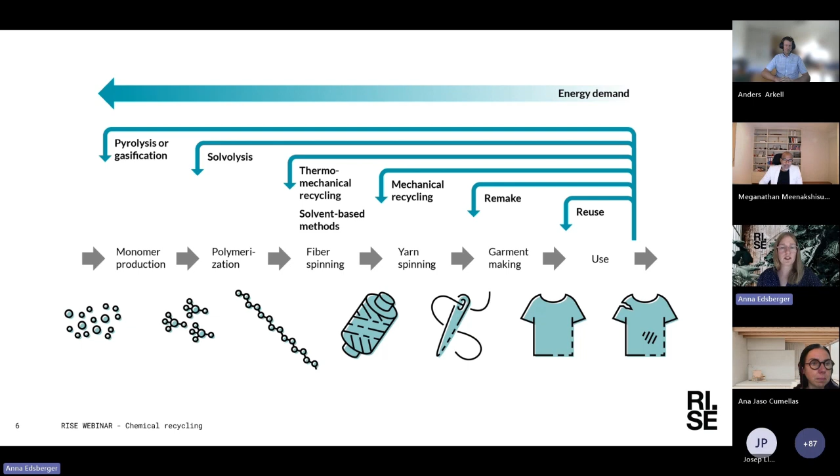At RISE, about 3 years ago, our research in chemical recycling was almost exclusively done based on the funding from research grants. And we used some 10, 12 years building up knowledge in the area. And today, about half our revenue on this matter is actually from the private sector. So we are very happy that we've been able to do this transition together with partners and with companies that are now utilizing the knowledge that we have built.

And as a research institute, this is really how you hope that it should work, that you start out with gathering a lot of knowledge, and then at the end, that can be utilized in real world processes. Just setting the scene a little bit and also putting this into perspective. So today we're going to talk about chemical recycling.

When it comes to the life cycle footprint of a garment, of course, there are many different processes that have an effect on that. So you have a product, it becomes waste, it's collected and sorted. You probably have some kind of pre-treatment like decoloring. You make a fiber production, you manufacture a new product. And if we look at this from a life cycle perspective, this is a study from Mistra Future Fashion, so it's starting to become a little bit old. I think it's from 2017.

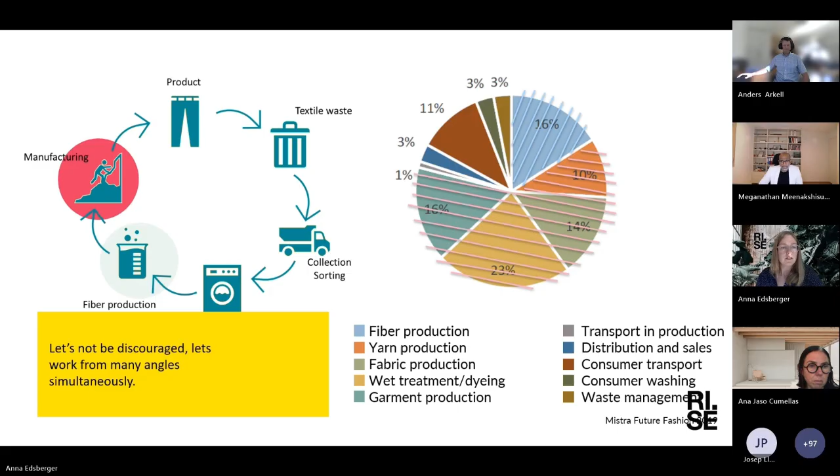So, just a little overview today, some recycling actors. When it comes to polyester recycling, we have four main technologies. So starting with PET, polyethylene terephthalate, we can use enzymatic breakdown of the polyester. It will form the monomer TPA, looking like this. If you're a chemist, this makes you happy. If you're not a chemist, it makes you scared to see these molecular structures.

You can use methanolysis, which means that you're breaking down the PET molecular chain by the use of methanol. Your end product there will be something called DMT. It's a different variation of the building block of polyester. You can also use glycolysis. That means you're breaking the polymer down in ethylene glycol or another type of glycol. Your end product then would be BHET, monomer looking like this.

And then one of your last options is the hydrolysis, which means breakdown in water, typically aided by either an acid or an alkaline environment. You will have then a TPA looking like this. And then there are some other processes like aminolysis and ammonolysis, but these are mainly used at an academic level. But the methanolysis, the glycolysis, the hydrolysis, and the enzymatic methods are currently used either at the startup state or industrialized.

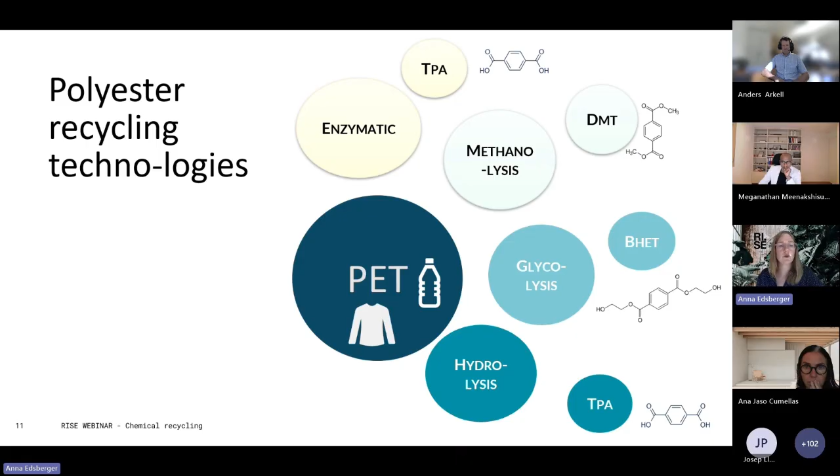So here you can see some of the actors. You can see that currently the glycolysis is the most used method. It's, from an industrial point of view, a rather easy method. You typically don't need to go to high pressures. It's a well-studied process, so it has a lot of benefits, which has made a lot of companies go for this solution. You have a smaller share here of companies going for methanolysis.

This can be a bit more of a challenging process because typically you will need to go to highly pressurized systems. Actually, this actor, Recyclit, has developed a method of low temperature methanolysis. I spoke to them this summer and I asked them what their secret is. Of course, they couldn't tell me, but I would guess it's in the catalyst. Enzymatic actors, not very many. We have Carbios, we have Samsara, using enzymes for the degradation.

And then hydrolysis, we have also some actors. Hydrolysis is also quite versatile. You get high yields. The difficulty is that you typically need to use a lot of auxiliary chemicals. So you would do this, I would say, almost always industrially in an alkaline environment. And in order to get your product, you need to use a lot of acid in order to precipitate a clean product. And there are smart solutions to this, but that's a difficulty that comes with the hydrolysis.

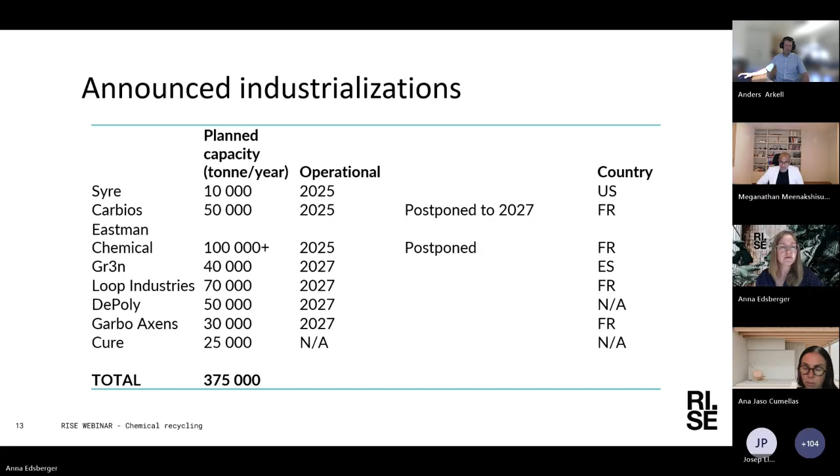So what's the cost then of a chemically recycled filament yarn? So this data comes partially from a seminar held from PETCore. So of course, the chemical recycling has several different cost elements. So you need to have collection and sorting of your textile. You need typically to prepare your feedstock. That could mean removing hard parts, decolorization, etc.

You have a section here from depolymerization and purification. And then the smallest share is getting back new PET polymer and then spinning that. And of course, each of these comes with a cost. For virgin PET, well, this price point changes all the time. Probably some of you have more recent data than I do, but we're at about half the estimated cost of chemically recycled PET. And when I spoke this summer to Tianjin, they said that this was approximately correct. So they were about twice the price of virgin material.

I also spoke to another contact who had been on a business trip to China visiting some of these factories, and she said that on monomer level it was plus 80, plus 90%, but on yarn level plus 60 approximately on the price. And I'm sure that some of you actually have more relevant data there than I do. But what we see here is that chemically recycled comes at a premium, just as the mechanically recycled material that we're used to from bottles. And you also see here that you have a lot of components here that you need to sort out in order to have a process doing the chemical recycling.

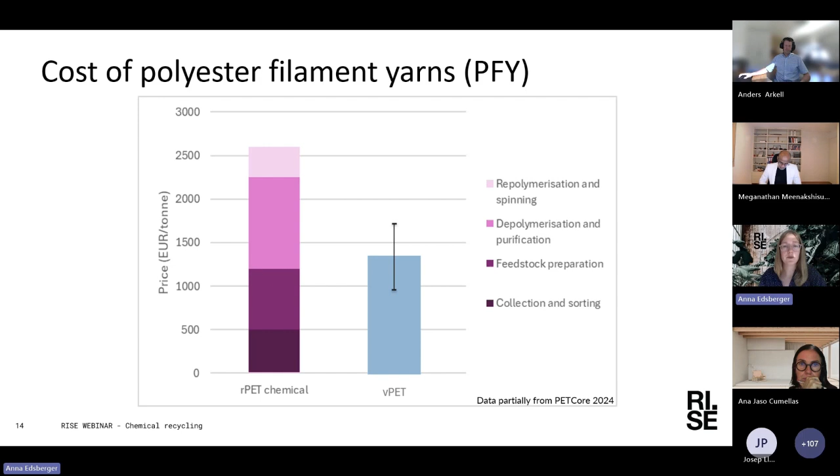Something else that might be of interest are, of course, the reported greenhouse gas emissions. Virgin PET, I took this data from Carbonfact, so about 3 kilograms carbon dioxide equivalent per kilogram of PET. rPET from bottles, about a third of that. Chemical recycling has a quite large spread. Depending on how you design your processes, you can come out with a much lower carbon footprint, but also actually a lot higher. Then, of course, a process that comes out at much higher carbon footprint probably would have difficulties industrializing. But it is perfectly possible, if you aim to recover any byproduct, any additive, etc., that you might build a process that actually doesn't have a positive carbon footprint.

We have developed a glycolysis process at RISE. This is basically a scale up from a lab scale process. There we see that we are at about 75% of the carbon footprint of virgin PET. Cure, another glycolysis actor, is reporting a lot lower values. Syre is a little bit vague. They say that they can have up to 85% reduction. ReJu, also glycolysis, and Carbios is doing enzymatic. They're saying that they will have about 50% reduction.

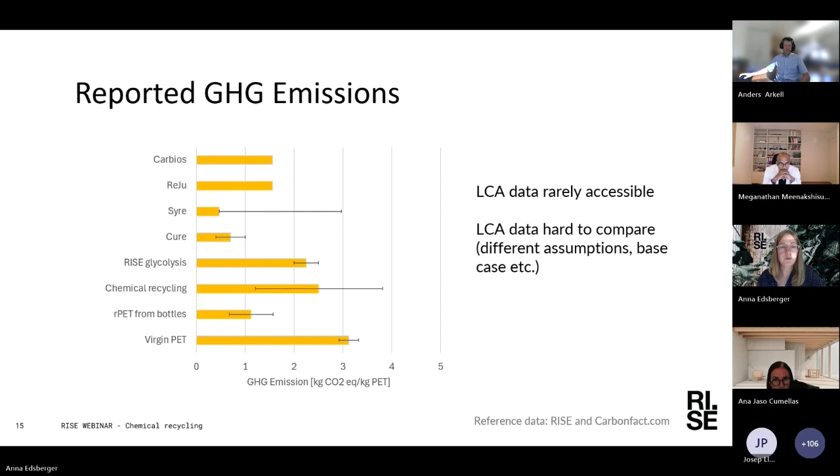So I'm going to talk a little bit about polyester recycling in general and the challenges that we see today, and then go into what we are doing at Rewind and how we are trying to face these challenges that exist. So I would actually like to start to elaborate a little bit more on the LCA data that you, Anna, showed us just before.

And there have been a lot of reports available saying either that chemical recycling or textile recycling is favorable, or that it's just as bad as virgin textile production. And of course, all of those are correct. It depends how you look at it and how you are performing the recycling.

So coming back to what Anna said in the beginning of the presentation, if you can do mechanical recycling, that is the obvious choice. It has the lowest impact and it's cost effective, and good from many perspectives, but when it comes to textiles, it's a rather limited amount of textiles that are actually reasonable or doable to do mechanical recycling due to the complex blends, mixtures, colors, etc. And also because you want to get back the virgin quality, not downcycling.

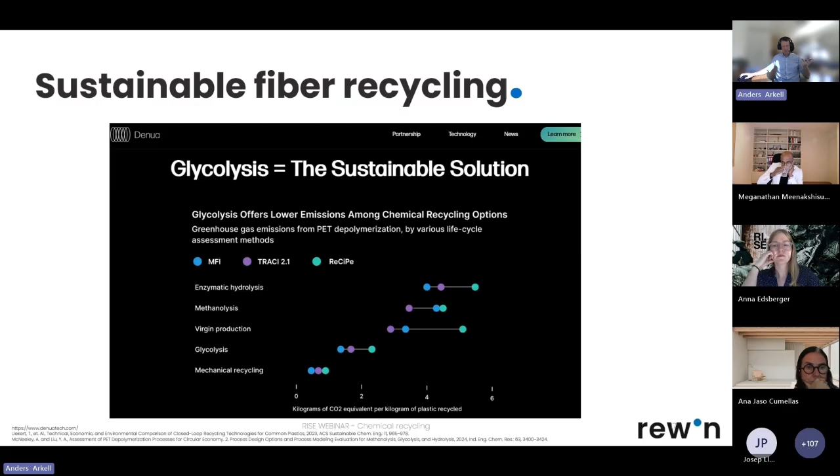However, glycolysis shows much better potential in that respect, and that is one of the reasons why we at Rewin work with glycolysis. So what do we work with? What is our feedstock? Well, for some time we have had the intention and clear aim to work with these post-consumer textiles that are separately collected since January this year.

But what we have seen recently is that our thought that this would be accessible was not really correct. Instead, we have seen what some actors call a chaos in the collecting system. We see that second-hand and charity organizations have difficulties, and we don't see an establishment of a material sorting industry. This means that polyester recycling based on this separately collected post-consumer textiles is probably a little bit ahead of us in the future.

Instead, we have started working with other fractions that we believe are more available in the near future. One is post-industrial waste, like clips and spills from the production. Then we are not talking about Northern Europe because we don't really have a textile industry at scale here. Instead, we are mainly talking about Asia, where that could be relevant. But one other interesting fraction that really exists here is post-sorted municipal solid waste.

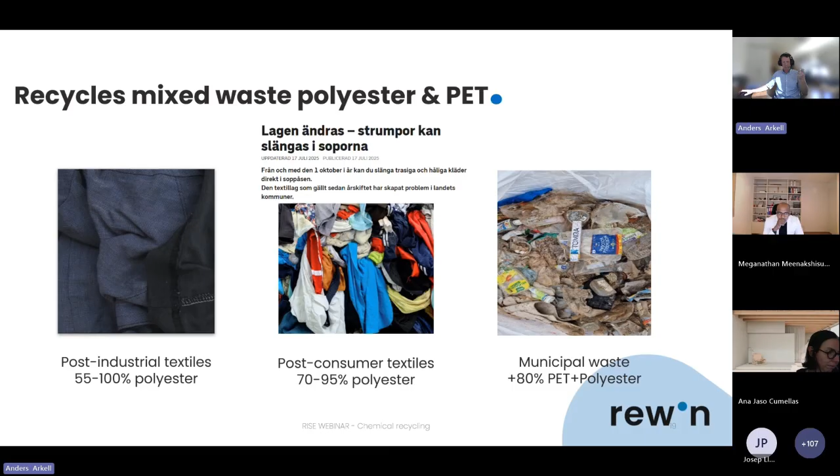So, at Rewin, what are we doing? Well, we are working with these three different fractions, and we have set up a process that is very much simplified on this picture. But what differentiates us from all of our competitors is that we have totally skipped one of the major process steps that usually is in the beginning of the recycling process, and that is the pre-processing. Instead of shredding, hard part removal, trim removal, compaction, agglomeration, pelletization, we take the textiles as they are directly into a chemical reactor where we dissolve the polyester. And by doing so, we increase our yield significantly and lower the cost of the process.

The report that Anna referred to earlier states that all this pre-processing typically costs like 700 euros per ton of textile waste, and we have removed that with our pre-treatment reactor in our process. We also have a special type of catalyst that not only degrades the polyester into monomer, but also enables us to do very efficient decolorization. So our product is the BHET monomer that is completely white and has a quality that can replace the virgin material, the fossil material, in the big polyester producing plants in Asia.

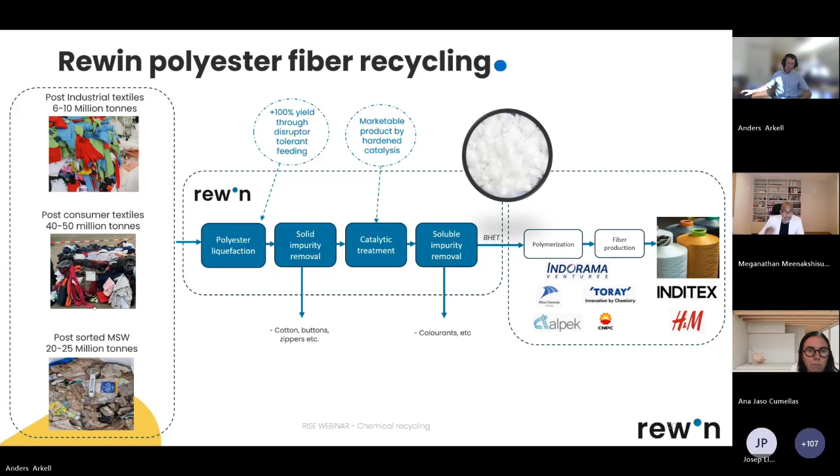So our quality is proven. We have several polyester producers that have confirmed that our quality is as high or sometimes even higher than the virgin raw material that they use today. So that is not an issue. The processing is not an issue since we have cut off all these pre-processing steps. What is more of a challenge is accessing the feedstock for this kind of plant.

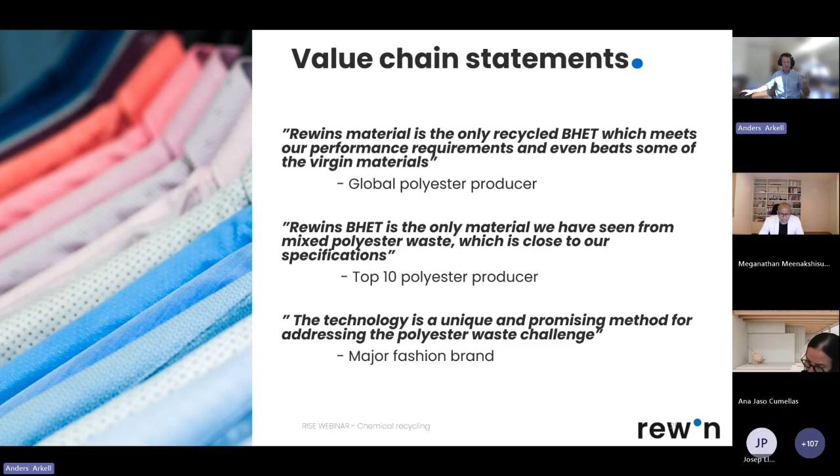As I said, we have hoped for this post-consumer collecting system, and we see that that is probably a few years ahead of us. But we are continuously working with all of these three options: the post-sorted municipal solid waste when it comes to a European or North European context, and also the industrial spill when it comes to a more Asian context. Right now, we are 3 weeks from factory acceptance test for our pilot plant. This pilot plant will be commissioned by the end of this year.

And by having that in place, we will be able to produce hundreds of kilos for test batches sent to the polyester producers, so that they can do pilot polymerization and pilot spinning and confirm offtake of this product. And in parallel, we are working on securing feedstocks for our first plants.

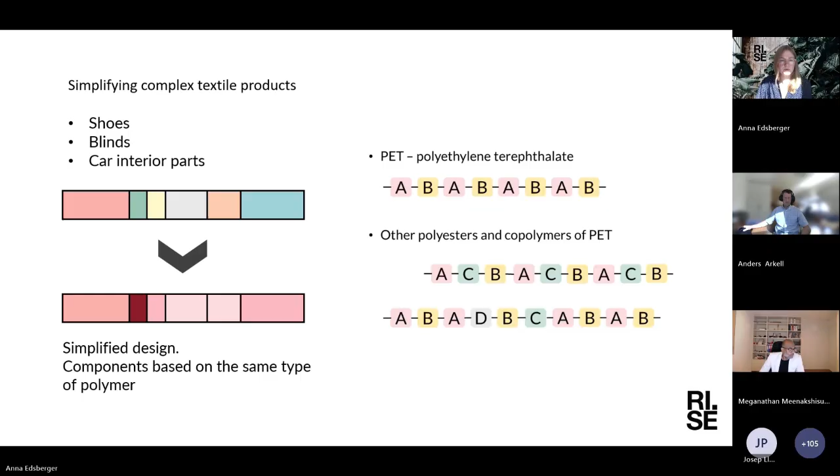And what we have learned at RISE, because we've been doing this for a bit, so we have tried these different types of recycling methods: methanolysis, hydrolysis, glycolysis. And what we have learned is that typically hydrolysis and methanolysis have a higher tolerance. So you get a higher yield of the terephthalic monomer if you use hydrolysis and methanolysis compared to glycolysis for this kind of more complex polyester-based materials. And we have done trials of both full components and individual materials, and we do evaluation of both crystallized monomers and monomers in solution.

And I also wanted to take the possibility to announce a new service that we have formalized, which is focusing on just this recyclability evaluation of polyester-based materials. So we do this on both individual components and finalized products. So if this is something that would be of interest to you, then please reach out to me. And of course, we also do consulting on what kind of materials you could use in such polyester-based solutions.

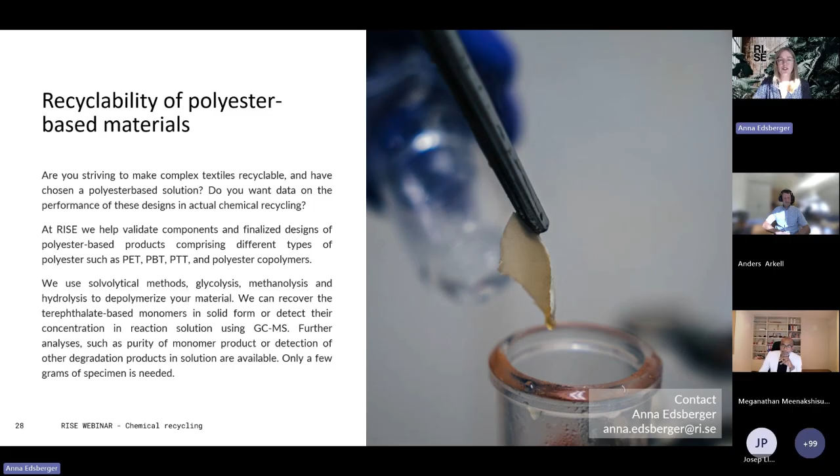Let's talk about what we as a company, Autoneum, think about polyester and in which areas we are already using it. Just an introduction about Autoneum, because I think many people from Sweden may not be aware of Autoneum. We are an automotive tier 1 supplier company. It's a Swiss company based in Winterthur in Switzerland, and we are listed on the Swiss Stock Exchange. We are a global mid-sized company with 16,500 people worldwide, operating in 25 countries, having 77 production facilities which produce components and deliver to our customers, which are the OEMs.

Just a quick review of 2024. We opened a research and technology center in China. We have an internal Level Up corporate strategy program to improve several things. And we launched a sustainable polyester-based product portfolio for commercial vehicles, and a fully recyclable trunk side trim made of 100% polyester was also launched last year.

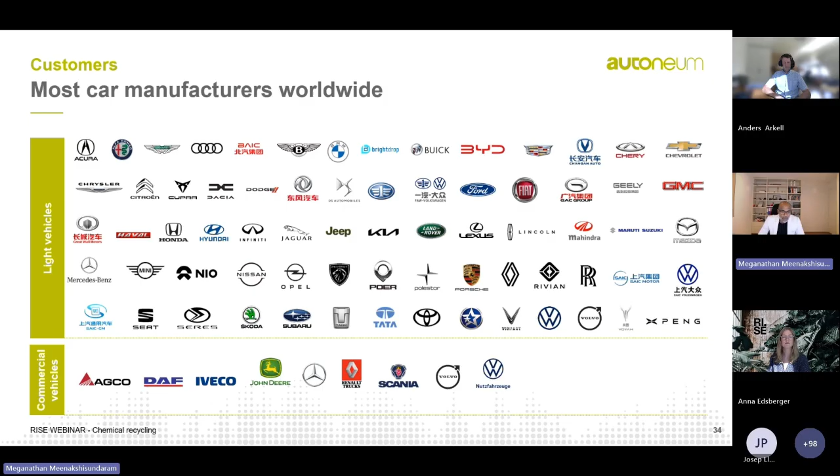The most car manufacturers we supply, some of the brands, are listed here. Of course, you see also from Sweden, Volvo, and also the other companies, the growing new car companies from Asia. Okay, that was the introduction about Autoneum. Now let's get into the topic about circularity.

So I think this is a very nice picture which talks about circularity in the automotive sector. Basically, the circle starts from this point where you have been awarded a business from a customer, and the product design, the whole development process kicks in, and it takes around 18 months. Sometimes it's shorter, sometimes it's longer, depending upon the customer and the product, but on average this is the time from the award to develop the product and bring it into serial production.

Then you have the serial production, and from the serial production, it goes into the car, to the car manufacturer. That happens in very few weeks. We all have the just-in-time concept, and automotive is very lean. So basically, once you have a value-added product, it directly goes to the customer, the customer builds it in, and it goes out from the customer's place. In this case, it's the OEM.

From there, the cycle is much longer. We are talking about a part inside a car, particularly the floor system, and then we are talking about basically 15 years, or in some cases even 20 years. Then once it goes to the end of life, if we could take the part, again with a very short turnover of a few weeks, you could reprocess that material and bring it back. So it's not like the bottle industry or other industries where the life cycle is much shorter; in automotive, the life cycle is much, much longer.

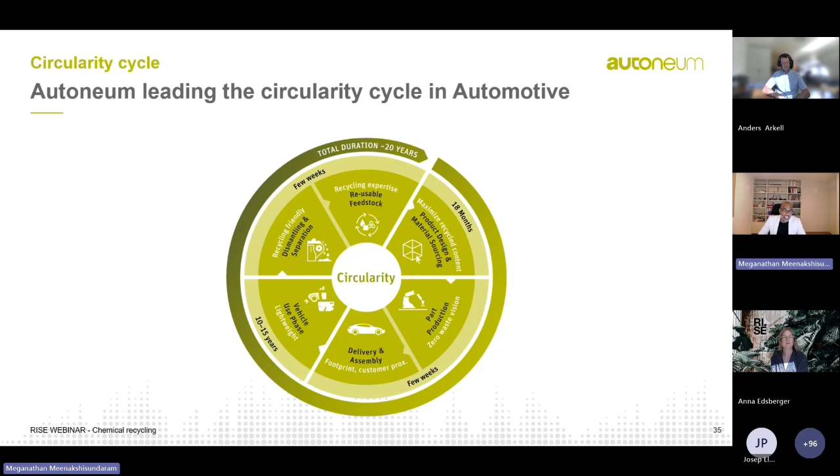So we need to have design thinking right from the beginning. The end of life might happen after 20 years, but we should design the product today in a specific way so that we could recycle it and make use of this material after 20 years. Of course, there is a very short gain immediately during part production. There is trim waste which could be reused immediately; I will come to that point later. But the real gain at end of life will happen later, and the design thinking has to be there immediately in order to realize that.

So we as a company are strategically looking at polyester as a monomaterial solution for several reasons. A few of them I have highlighted here. The first one is it's available in different formats and properties. You can fine tune it and get it in flakes or other sorts of materials. It is suitable for interior and exterior parts. That's where Autoneum is specialized: our core competence is acoustic and thermal management, and we supply interior and exterior parts to our customers.

And there is good availability of post-consumer waste thanks to globally available mass production and a lot of industries using polyester. And the final point is that it's a polymer which has low greenhouse gas emissions compared to others.

So the components that we can make out of this material can potentially have a high recycled content, thanks to already available post-consumer and post-industrial waste. And then we have a full recovery and recyclability at the end of the vehicle life cycle if you make everything in polyester. And it's a more energy and cost efficient recycling process when you compare to other processes, depending upon whether you are talking a thermal process or chemical recycling. In our case, we are talking about a thermal process, which is taking it out, melting it and making it a new fiber or yarn.

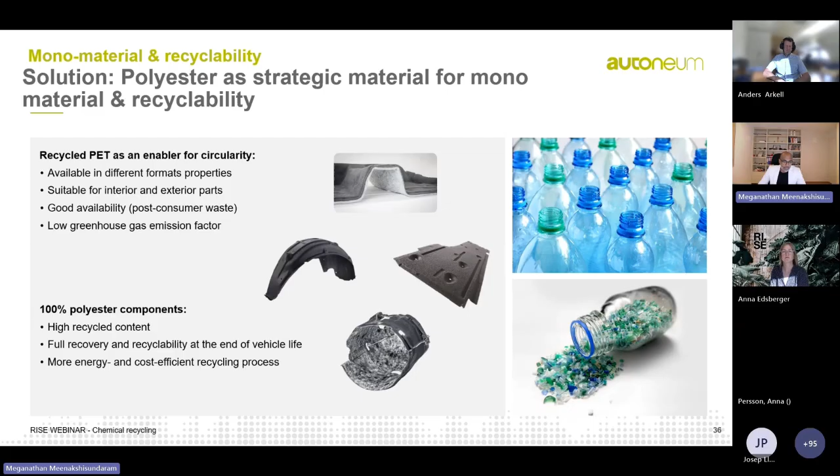This is a kind of an interior view of a car where you could see different parts inside the car and maybe on the outside underbody. And these are all the 4 product lines where Autoneum is very much active. So we define monomaterial as made from a single type of material throughout, which can be thermomechanically recycled. As I mentioned before, you take the polymer, you heat it, you melt it, and it could pass through an extrusion or another process, and you get out a value added product, not a cheap product, without the need for separation or disassembly and without significant loss of value. So that's exactly how we define the monomaterial.

And here are the 4 product portfolios: the interior floor, trunk and interior trim, engine bay, and underbody. The textile materials we are talking about are 20 kilos for the interior floor, 4 kilos for the trunk and interior trim, 3.5 kilos on the engine bay, and 7.5 kilos on the underbody panel. And in those 4 product lines, you have up to 80% average recycled content on the portfolio, depending on the product line.

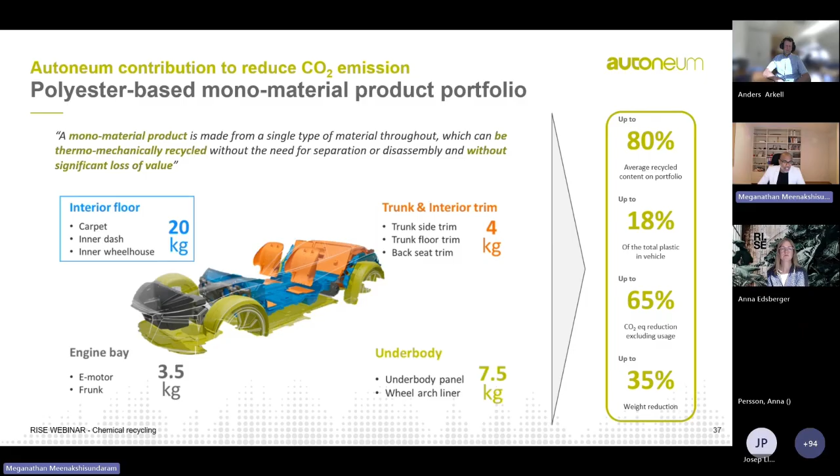And it's up to 18% of the total plastic if you bring it back, and up to 65% CO2 reduction, excluding the usage phase, because we know the usage phase depends on the weight and other things. And then up to 35% weight reduction we can bring in by having this monomaterial textile composition. For us today, we just quickly look at the interior floor. That is where I'm coming from.

Here, this seems to be a complex slide, but it's much easier. On the left-hand side, you see a traditional carpet floor system and how it would actually look. You have several layers and several polymers. That is the main drawback today: whether we want to recycle this material after 20 years, or today from the trim waste, we cannot do it, because the individual layers are different polymers, a mix of thermoset, thermoplastic, and a polyurethane system, which makes it extremely complex, so they are landfilled and there is no end-of-life concept.

However, this has been the traditional approach. We as a company have been working on this in the last 4 or 5 years, and we came up with a simplified bill of material monomaterial carpet system, where, as per our definition in the previous slide, all the layers are of the monomaterial polyester polymer. And by this, we could also bring 50% recycled content. The trim waste generated during the molding process we could recycle 100%. And at the end of life, you can take the system out after 20 years and it could be completely recycled. So I think this is a very big and bold step.

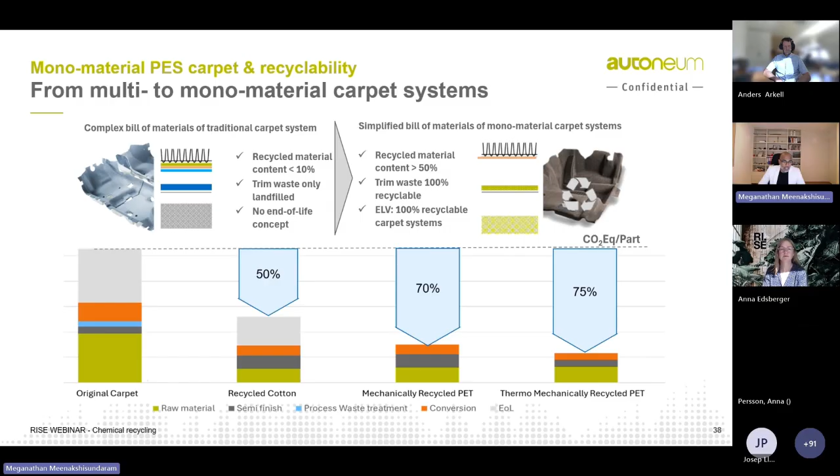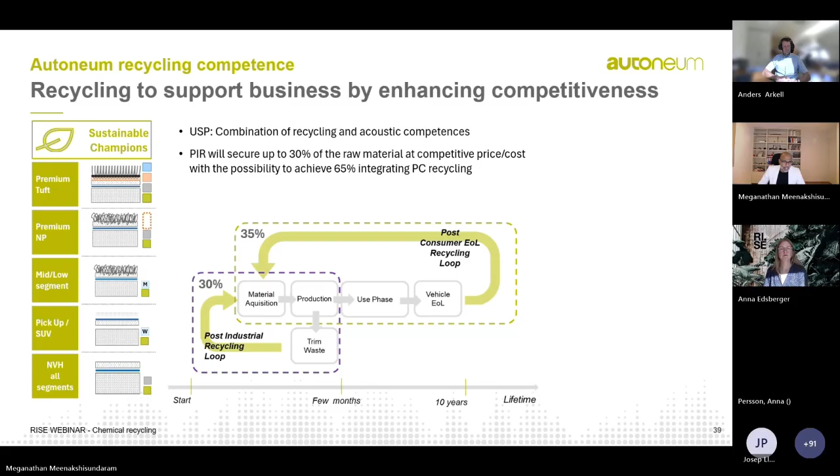So the key takeaways are basically our vision is actually to have zero waste through a sustainable design. That would be fantastic if wherever we could reduce the waste, if possible. But there are areas where we cannot completely do it today due to the shape, due to the geometry, and due to the products which we are in. Where we cannot do that, then we are shifting towards the monomaterial components, which is very key to circularity. So that's the second step.

Then the third one is actually the Autoneum interior products, which actually enable us to meet the latest end-of-life regulation, because there is a regulation which is coming. We should take and reuse these end-of-life materials back into the car. So today's wastes are the materials for tomorrow, because once we have this monomaterial and once we have the waste collection system established from end-of-life vehicle recycling, the waste becomes a very important raw material for tomorrow, and also gives cost effectiveness.

So all we need to do is to act together, with our sub-suppliers and our customers, to design the product in such a way that we meet these end-of-life targets in 2032. And we are also the first company to go into the market with a 100% monomaterial flow system, and we are already supplying to our customers, and we expect the other customers are also following it very closely and very rapidly to fulfill this end-of-life target, and this makes less dependency on oil and fossil, and makes us use our waste more effectively and efficiently.

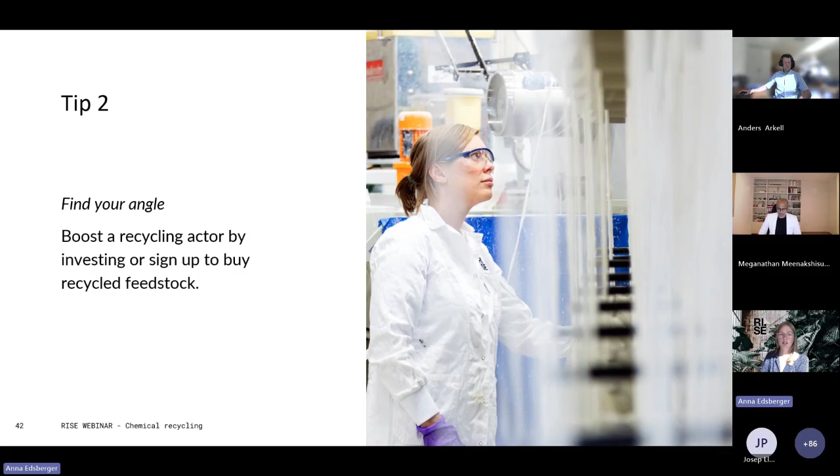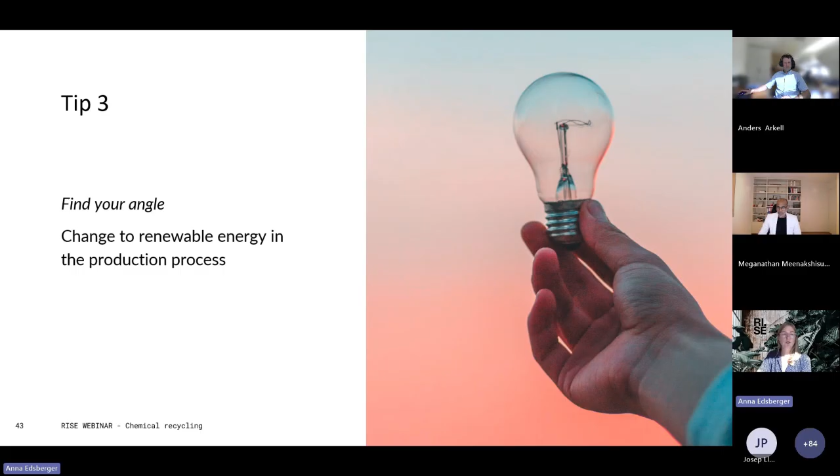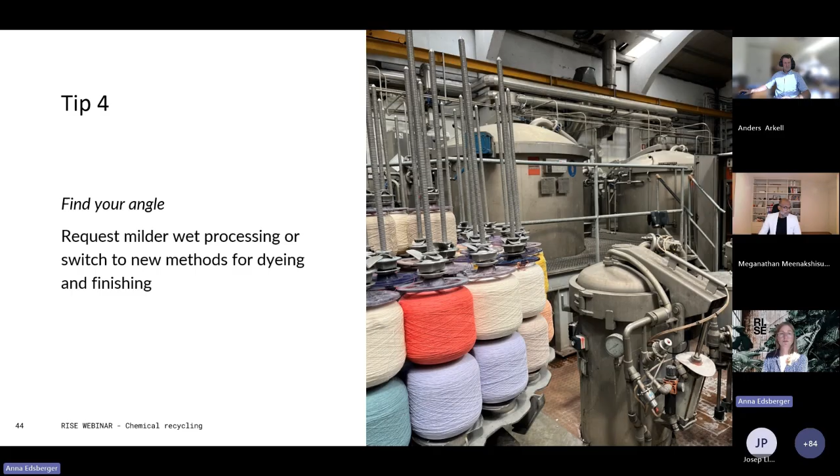But then let's go to questions. So the first one I see here is from Magda, and I think we could direct it to both Mega and Anders. So the question is, do you see a need for any policy changes in Sweden or the EU to make recycling more profitable or large scale? Maybe we could start with Anders.

Yes. So from my perspective, I think that recycling can be profitable and could work at large scale without any direct policies regarding the recycling itself. But our issue is securing the feedstock. So I think that we need to look at how other countries or other sectors have done it.

For example, in plastic packaging, we have an already established EPR scheme, and that means that the cost for the collection and the sorting is covered, and that has enabled plastic recycling to grow during the past few years. And we see kind of the same in some countries like France, for example, where they have had this EPR scheme for waste textile for some 10 years now, so that they can build and scale up textile sorting prior to recycling capacity coming in place.